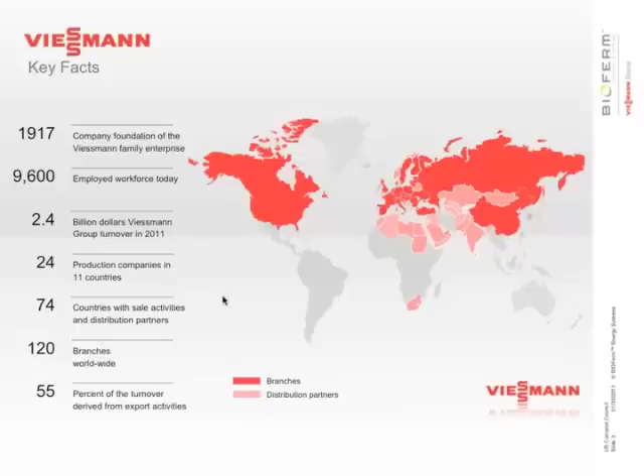A little bit of background on BIOFerm Energy Systems and who we are. We're a subsidiary of the Viessmann Group. The Viessmann Group was founded in 1917. It currently has over 9,600 employees, and it does $2.4 billion in revenue each year, with 60% of their business being in the renewable energy sector. This is a range of their products, ranging from heat boilers to anaerobic digestion.

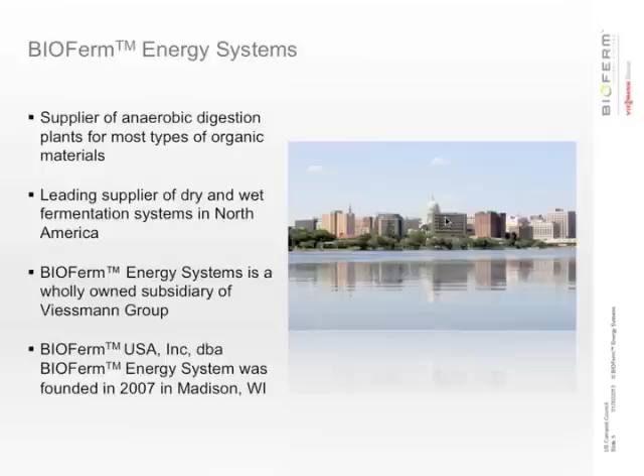BIOFerm Energy System is located in Madison, Wisconsin. We've been here since 2007. We're a technology supplier of anaerobic digestion for almost any type of feedstock. We supply both dry and wet fermentation technology in North America.

This is a range of the technologies we offer. The first diagram you see at the top is dry fermentation, which this will be focused on. Dry fermentation feedstocks typically are yard waste, food waste, any sort of structured material that can be stackable. This type of system is a garage system, a batch system. You'll load it up, close the doors, remove oxygen for 28 days, and let it ferment to produce biogas. Biogas is collected and then fed to either a CHP or another form of equipment which utilizes it to make electricity and heat.

The second system is wet fermentation. This is what most people are familiar with, what you'll see on the large dairies and large farms across the U.S. This system is a large, complete mixed tank system. You pump your feedstock into the digester. Retention time is typically 28 days. Again, you allow it to produce gas, collect it, and burn it. Typical feedstocks for this type of digester are liquid manure, corn silage, food waste, and any sort of energy crop.

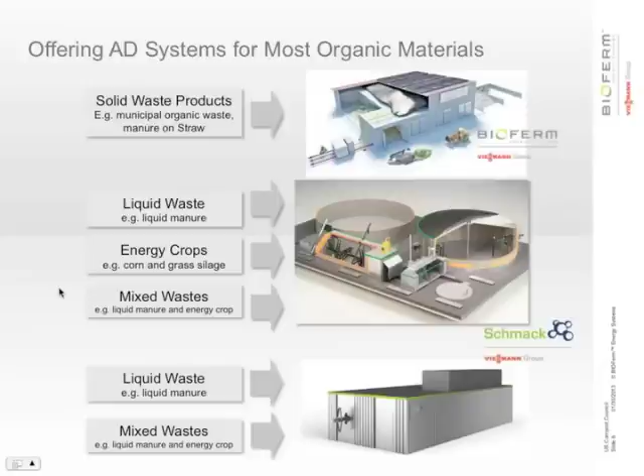The last technology is our newest model. It's a small containerized digester, slightly larger than a shipping container, and it's all in one. This digester has the digester tank and CHP, the energy production unit, all in one container. This unit takes feedstocks such as food waste, manure, energy crops, a wide variety.

Here's a breakdown of the three systems again. The wet digester, which people are most familiar with, is what's called a wet system. It takes feedstocks with a range of 8 to 12% total solids, and the feedstock needs to be pumpable - that's one of the key factors. The second system is our plug flow, similar to that smaller containerized unit, which takes feedstocks from 10 to 25%. The last one is the dry system, typically with a feedstock range of 25% total solids and higher.

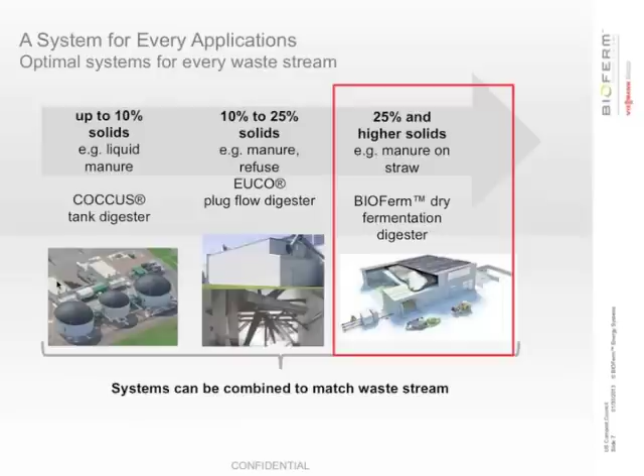The way this works is you mix half fresh material and half digested material, then reload it into the digester. This is done to inoculate the material, to help heat up the new digestion process, to help the bugs be present in the new process, and to make your biogas production quicker.

You load the digester about 80% full and then close the doors. The bugs present begin to break down the material and produce biogas. Biogas is a mixture of 55% methane and 45% carbon dioxide, with a couple trace materials such as hydrogen sulfide, ammonia, and water vapor.

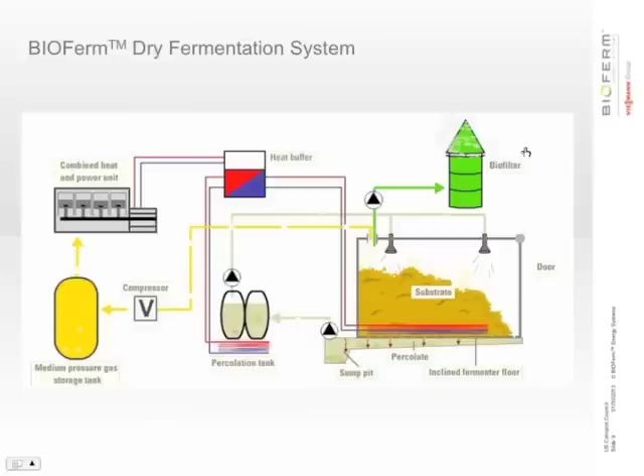So if any part of the process, your substrate handling, your feedstock handling, mixing, opening of the chamber's doors, is happening, all the gas that's produced in that area is collected and goes through a filter so that no odors are released to the surrounding area.

So this is kind of a summary of what I previously talked about. The digestion process is 28 days. This can range from 20 days to 40 days depending on what your feedstock is. Food waste tends to break down much quicker than substrates that are more coarse, such as animal bedding and yard waste.

Minimal liquid is needed to be added. As digestion happens, water is produced, so you collect that water and store it in the liquid percolate tank, which is then used to accelerate the digestion process.

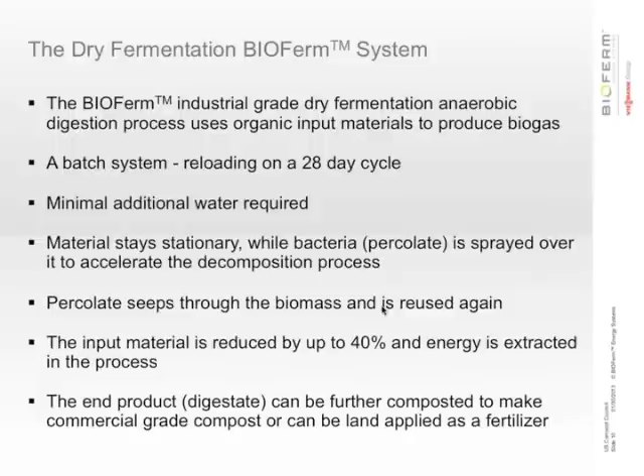Materials are stationary, there's no moving parts in dry fermentation. The input material is reduced by 40% as energy is extracted. The end product, which you remove from the digester, is called digestate, and this is where composting is involved.

I kind of wanted to go over some myths, common myths of anaerobic digestion. Myth number one: it's smelly. A lot of people think of digesters and think that they're odorous and smell worse than dairy farms. But this is not always true.

This is why our whole operation is kept under a biofilter. Any odors that are emitted during the process are collected and moved through a biofilter. Our biofilter, which we use at our facility here in the US, is a biological biofilter. The gas will move through a biological filter where the microbials eat the smelly components and release clean air.

The smelliness of the digester depends on what substrates you're handling. Some substrates break down much quicker, reducing more odors, and other substrates don't.

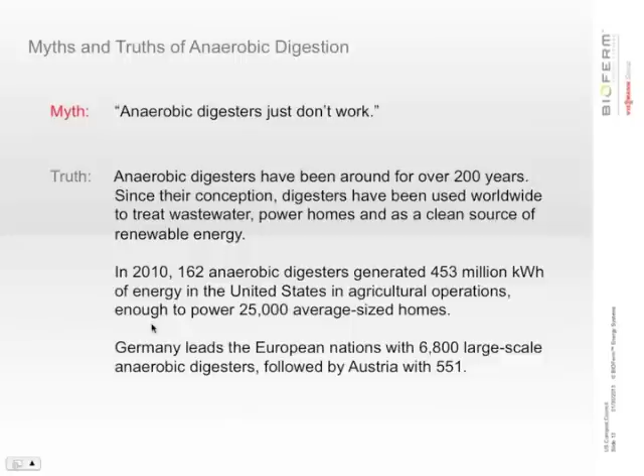And as most people are familiar with, Germany is the leader in anaerobic digesters, having over 6,800 large-scale digesters ranging from farm-based to food waste applications and whatnot.

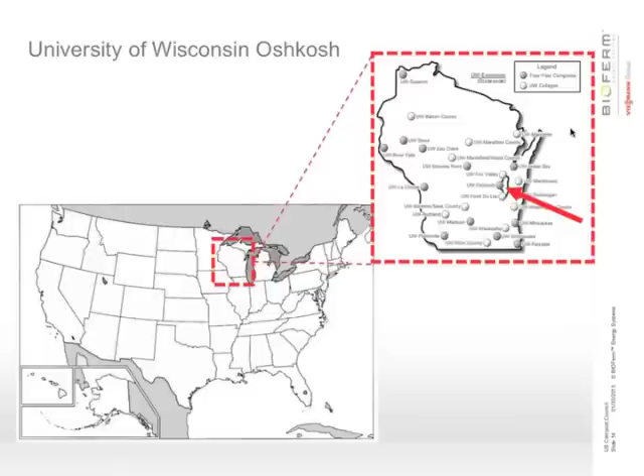So our first installation of dry fermentation in the U.S. was in Oshkosh, Wisconsin. We had a partnership with the University of Wisconsin-Oshkosh. They have a goal to be off-grid, be carbon neutral by 2025, and this was one of their projects to help them meet that goal.

Their facility is a 4-fermenter dry fermentation facility. Their installed electrical capacity is over 370 kilowatts. Their feedstock consists of food waste and yard waste—food waste primarily from grocery stores, and the yard waste from the campus and the city of Oshkosh itself.

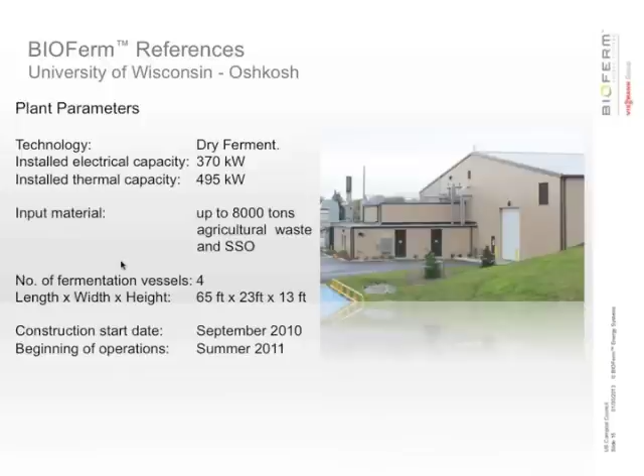As I mentioned, it's a 4-fermenter vessel. These are actually short fermenters. The typical fermenter is 99 feet long. They went with a shorter one because they had concerns with not getting enough feedstock, so they are 65 by 23 by 13. Construction began in September 2010, and they've been over a year and a half in operation now, producing gas.

As I mentioned, their feedstocks consist of food waste from the local grocery stores and restaurants, yard waste, which means grass clippings, leaves, shrubs, and wood chippings from both the city of Oshkosh and the university landscape itself. Post-consumer food waste, they're taking in a small bit from the university's cafeteria, and animal bedding from the local farms.

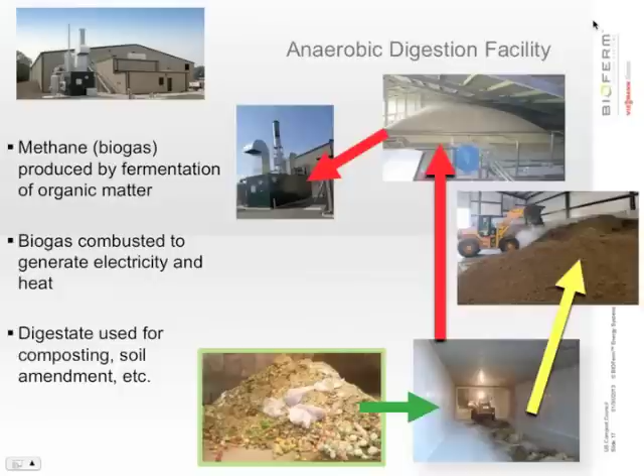Out of the digester after 28 days comes the digestate, which looks similar to the third picture you see with the front-end loader. Digestate looks similar to wet compost, very earthy. As it breaks down, it produces biogas. In their application, they burn the biogas to produce electricity and heat. They produce enough electricity currently to power 10% of their school's need.

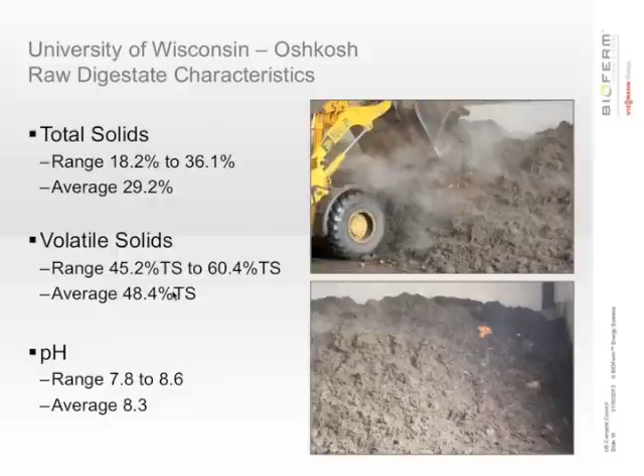So they have created a partnership with a local composter. The composter takes the digestate and composts it further to a finished product. The digestate that comes out is typically about 29% total solids. It looks like I said, wet compost. The volatile solids is typically in a 48% range of the total solids, and the pH ranges from 7.8 to 8.6.

The composter then uses a windrow to aerate and further process this material. There's minimal addition of carbon used and minimal monitoring. He monitors temperature and pH. It's a very low budget operation, but it seems to be working well for him.

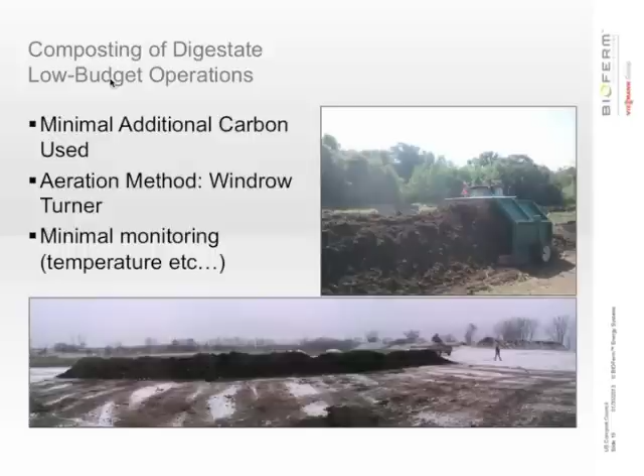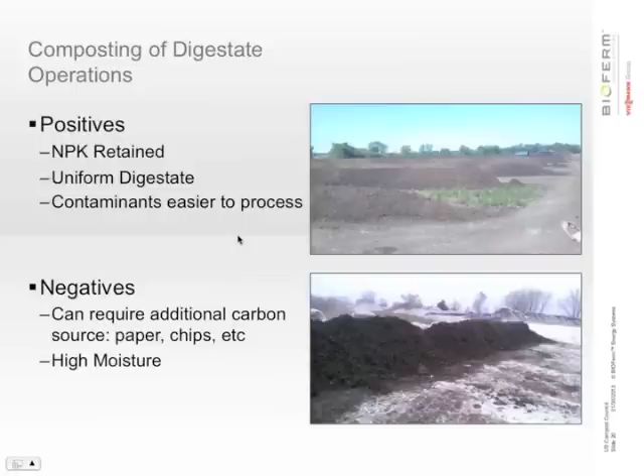So some of the negatives and positives. The positive is that the NPK ratio is retained through this process—basically all you're removing is the carbon source to produce the methane gas. The digestate that comes out of a digester is a very uniform, homogeneous material, and contaminants are easily processed. The negatives are that it can require additional carbon source depending on how much was abstracted during this process, and it can have a high moisture content.

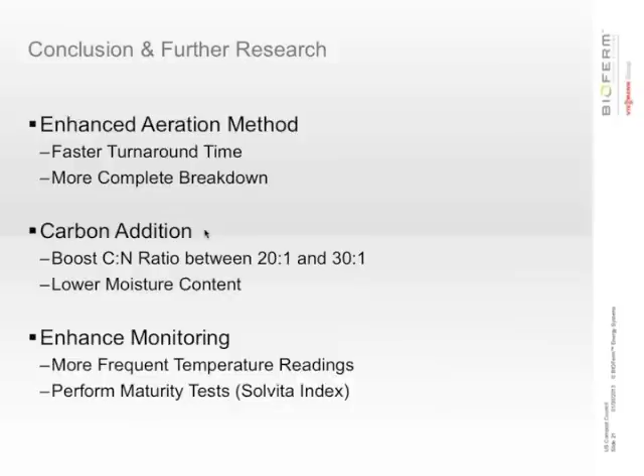Conclusions and further research: enhanced aeration may reduce the time required for composting of this type of material, leading to faster turnaround time and a more complete breakdown. Carbon addition—we need to determine how much carbon is actually required to get your NPK or C:N ratio. And with lower moisture content, some sort of separation may be required to add more benefit to the composting process. I think that's all of it.

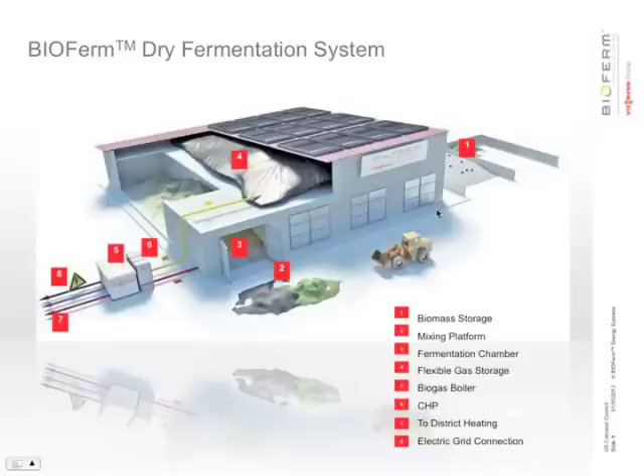All that material is stored in that Area 1 until a digester is opened and ready to be reloaded. So then we pull some material from Area 1 and mix it with old material in Area 2, right in front of the fermenter itself, and then we load it in.

Next question is, what is the typical NPK analysis for food residual digestate? I don't think we actually have those numbers available on any of the current feedstocks we've been using, and most of our feedstocks going into the digester, the food waste component's only 10 to 20%, so it's not entirely food waste going in there. That's definitely something we want to look into a little bit more, and I know the university is planning on doing some research with that this year, in line with the other compost research that they want to do as well.

Is there any testing done on the digestate for metals and pathogens? They have looked into it, I know, because they're trying to get the clarification between Class A and Class B biosolids. They don't do it on a consistent basis, but they have done it on a few batches, and I don't think I have those available offhand. I'd have to go to the university to get the data.

This question is concerning the sizing of the materials. Does the yard waste need to be chipped or size reduced before being put into the chamber? No, not necessarily. You want these materials to be stackable, and if you're putting too small pieces in there, then it's not going to be stackable. So typically, we'll just load them in as is.